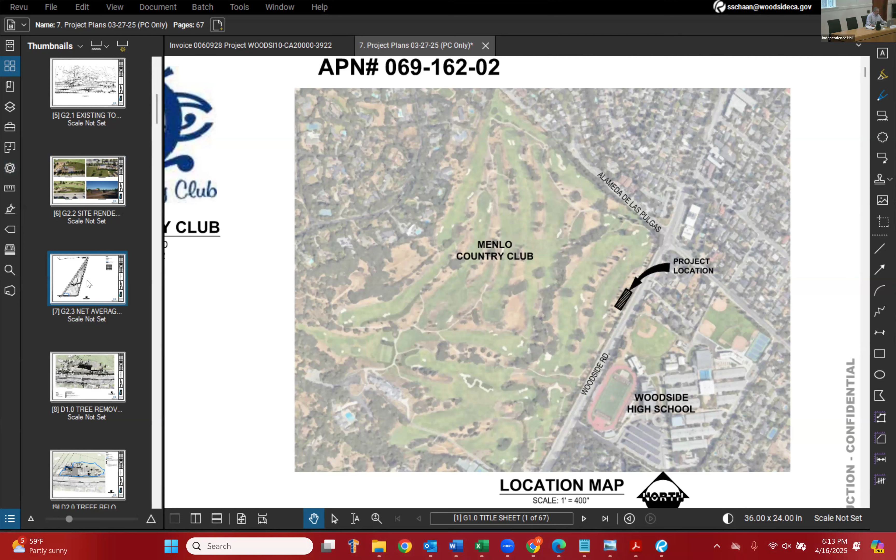Just show here the existing conditions. So here's just kind of a survey plan. I'll just try to explain a little bit. I know it's a little bit hard to read. Shows a number of topography lines. Along Woodside Road, there is an existing vehicle entrance gate there.

There's also, if you see this diagonal dash lines here, this is a major water transmission line for the San Francisco Public Utilities Commission. It's actually a parcel owned by the SFPUC, and the golf course has actually an easement to cross it to put their golf course on top of this water transmission line. So this access gate here, it functions, one, if there's any need for SFPUC to access their water line. It's also used by the country club in minimal fashion.

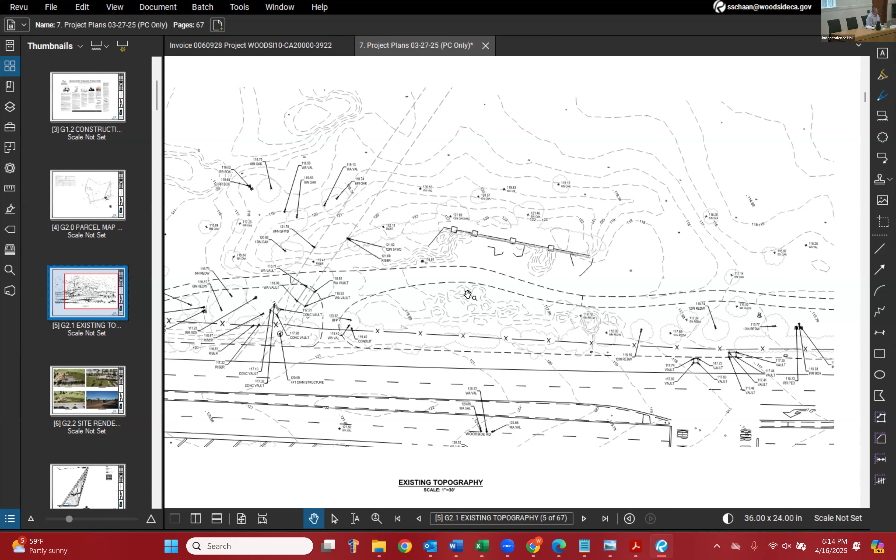There is an existing area here that is for sand storage. So for maintenance of the golf course, they have to replenish the sand in different areas. And so this is where they store the sand for the golf course.

So this is the site plan showing the proposed facility. What you see here is this dash line on the lower part of the slide shows the existing sewer line. And the Menlo Country Club would not trench through the Woodside Road. That'd be very disruptive to traffic as well as the roadway, but they would be boring a pipe underneath the roadway to the existing sewer line. And that would then take the wastewater from the sewer line to the facility.

There's a lift station here that brings it into the treatment area, a series of pumps and other mechanical equipment, all to be located within sound attenuated storage containers. So the sound coming off the site would be minimal. There's a noise study that's been provided for this project, and the project would not exceed any of the decibel level readings that are allowed at the property lines.

They are rebuilding the sand storage, so it's still incorporated into the same area, and that would be right next to the facility. A large piece of the project that no one will see once it's completed is the underground storage tank. So this is where the treated water will be transferred to the underground storage tank, and they would rely upon this water as long as it's available through the hotter months of the year. The remaining solid waste would then be rediverted back to the sewer line. So here's another line coming off of the site back to the main sewer line on Woodside Road.

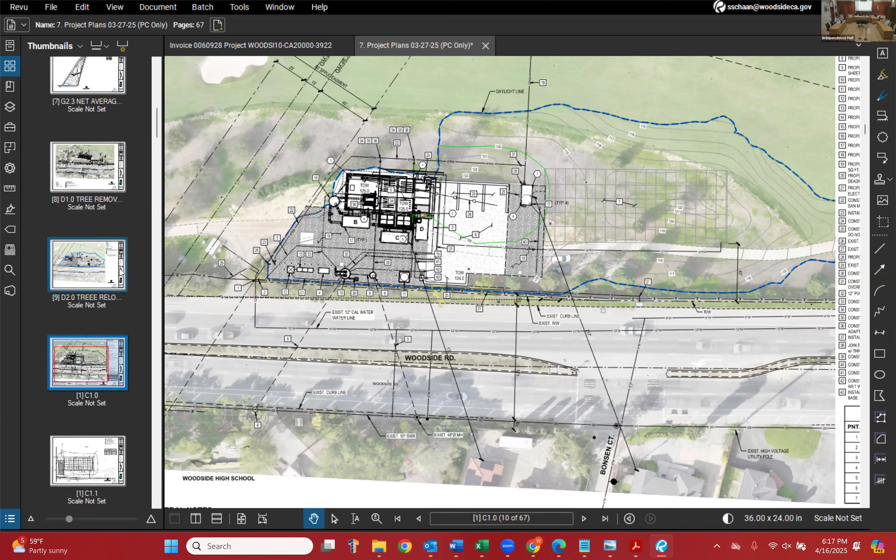So there's a lot of technical details in this plan set, but I think one of the easiest ways to understand and visualize the project is to look at the renderings that they've provided. So you can start here with these aerial renderings. This is a view from the Woodside Road area onto the site. This is that existing gate that I was talking about.

And there's some smaller equipment that's located adjacent to the fence, as well as a storage container in this area and maybe part of this storage container. All of these are within 50 feet of the front property line. Therefore, a variance is required. But given the location and the need to have close access to the sewer line, staff has outlined recommended findings for approval of the variance.

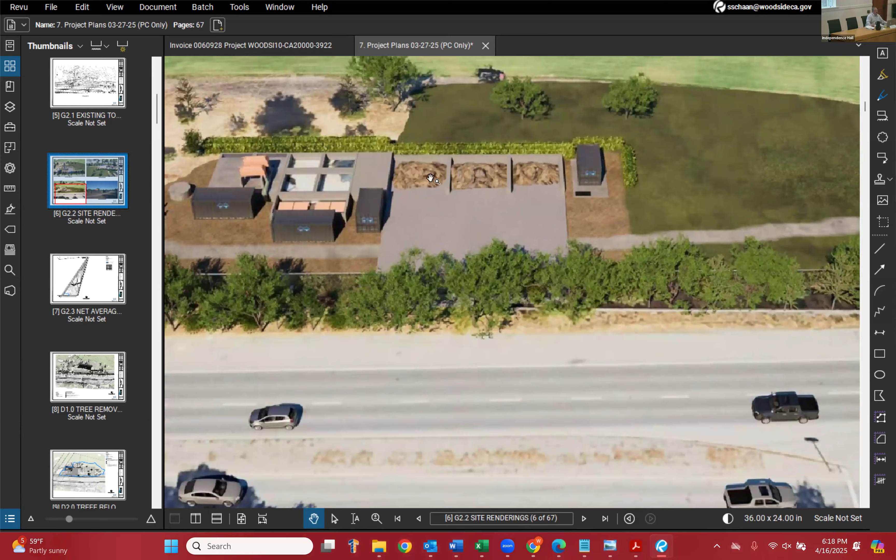So these would be the storage containers with different equipment in it. And these are just the sand areas. So these are not directly related to the water reclamation facility itself. It's just a replacement of the sand storage areas that are currently in operation for the club.

The Menlo Country Club is looking to do a berm to help kind of screen the facility from the golf course. There's also a recommended condition of approval to work with staff to see if there's any infill landscaping that might be able to take place along this border to further reduce the visibility.

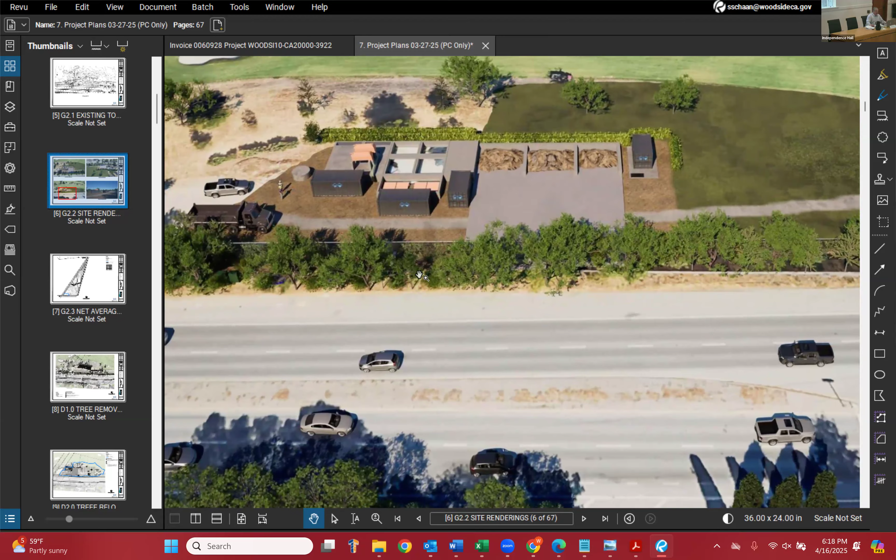And to touch on the visibility, the story poles are installed. So if you've had a chance to see them, you'll note that all of the equipment, even the storage containers, are below the existing fence line. Menlo Country Club has a 10-foot tall fence that was approved by a variance several decades ago. And it has slats inside of that chain link fence, so it really obscures the visibility.

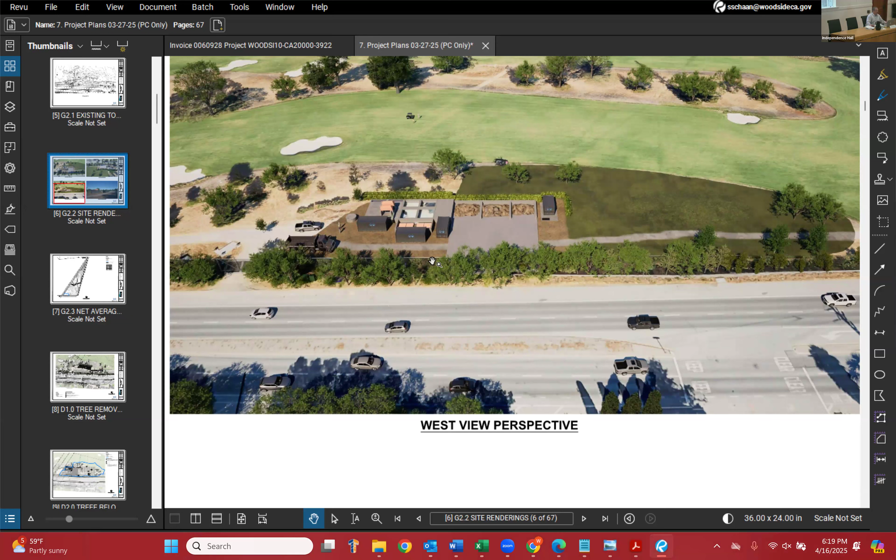And there is some landscaping there, and there are probably some opportunities to put in a little bit more landscaping to help fill that in. But none of the equipment will protrude above the fence line. So whereas we can see it in this aerial view, you really won't see much of this facility unless you're kind of peeking through the slats of the fence.

And we'll just show kind of some different views. These, again, are typical shipping containers, whereas these will be insulated with noise attenuation components to help reduce the amount of noise that comes out of any of the pumps or other noise generating equipment.

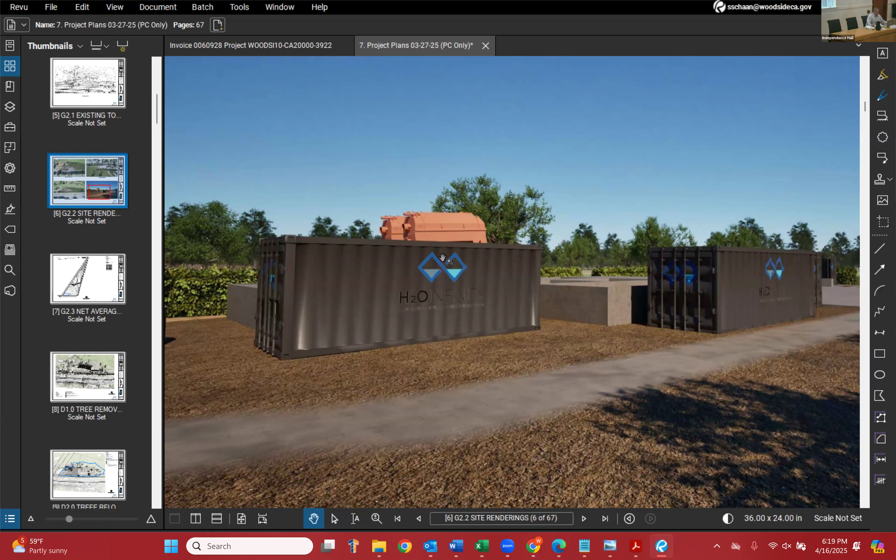This is just a side as viewed from Menlo Country Club. You can see a little bit better the little lift station area that would be part of what brings the sewage onto the site and releases it back out into the sewer system. But you'll see that, again, these pieces of equipment are relatively low profile, and staff has conditioned the project for whatever equipment can be to be painted a dark brown to further reduce the visibility.

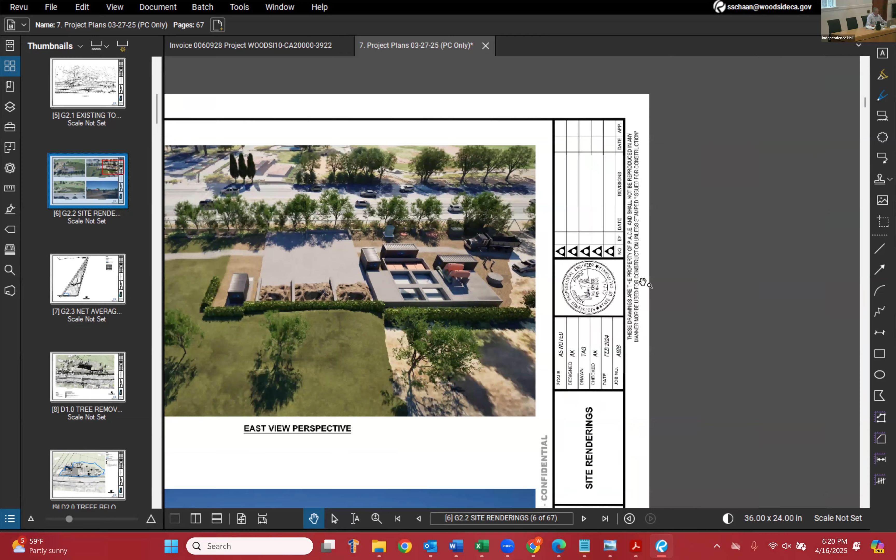And lastly, this is just a direct aerial shot showing everything over the site. I should note that this is not the only access to the site; the main entrance to Menlo Country Club further to the west actually has this kind of utility driveway that comes through their plant storage area as well, and it can be accessed from that.

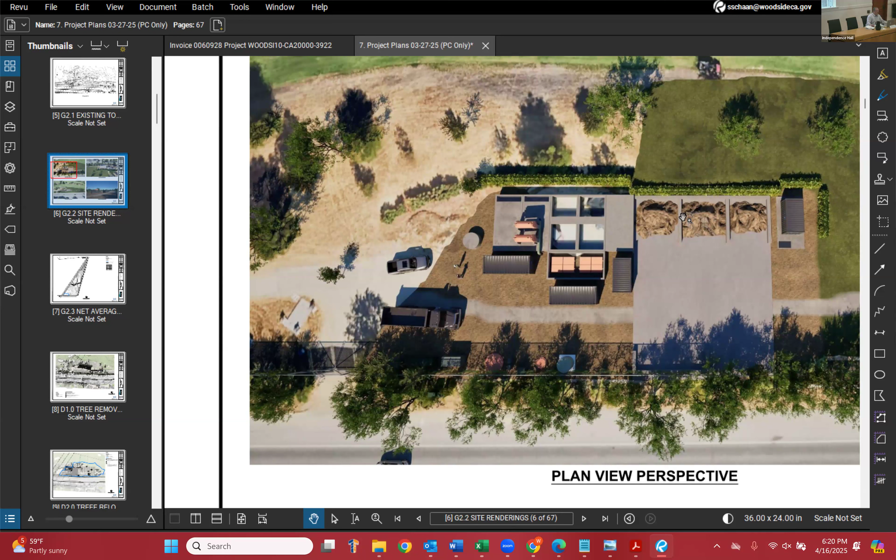So a lot of the smaller typical day-to-day traffic, if any is needed, will come through the main entrance, whereas this entrance will primarily be used for any large installation of the equipment, as well as it's used for the sand storage area.

With that, I guess I'll conclude my presentation. I'm happy to answer any questions you may have. And Menlo's team, as I've noted, has a lot more of the technical expertise and can help answer any of those technical questions if you have any.

Alex, do you want to lead off? I just have an informational question. Regarding the waste that will be the byproduct of the treatment, of the reclamation, this is just for my own personal interest. How will that be? Will that be mixed with water and then pushed down the sewer, going down towards Redwood City? How does that work?

That's right. You already talked to me. Thank you very much. Hi, Andy Comer. I'm the design engineer of record on this project on behalf of Menlo Country Club. Sage, great job on presenting that. You hit 99% of the points.

So just to answer your question, basically, wastewater is brought into the plant as needed to fill that tank, as Sage had mentioned. There's beneficial bacteria in there that basically remove all the solids, but then that liquid mixture can be strategically sent back to the sewer system at a time in the middle of the night, for example, to flush out the downstream sewer.

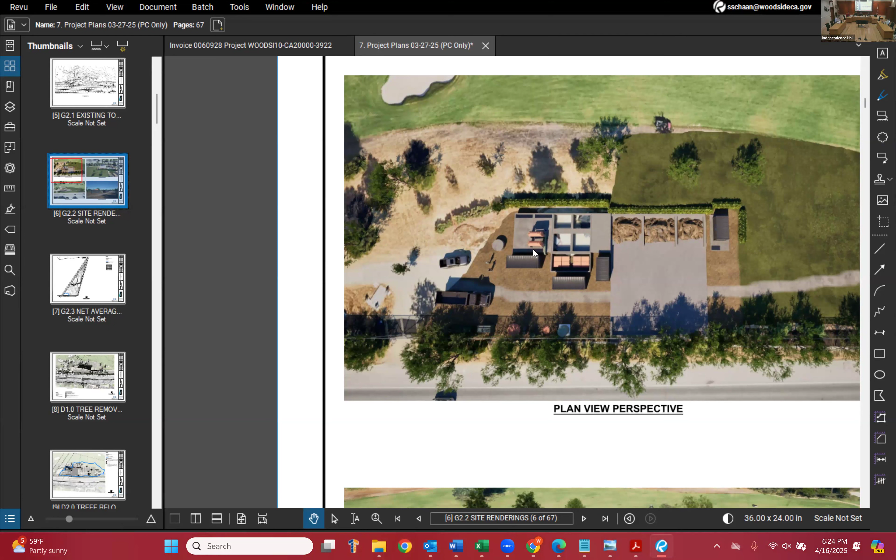And why don't we finish with questions for staff? Then we'll let this gentleman present on behalf of the country club, and then we can grill him as much as we want. So do any of the commissioners have further questions for Sage from the Townsend? All right, given that, the applicant or the applicant's representative can come on up, and if you have a presentation, do that, and then immediately, and then we'll move on from there.

Great. I think we have a PowerPoint presentation that is being pulled up. While that's happening, just by way of introduction, my name is Steve Gonzalez. I'm the general manager of Menlo Country Club, and I just want to thank you all for having us here tonight to consider this project. Menlo Country Club was incorporated in 1904, so we've been part of the community for 120 years, and in that entire time, we have dedicated ourselves to being responsible environmental stewards.

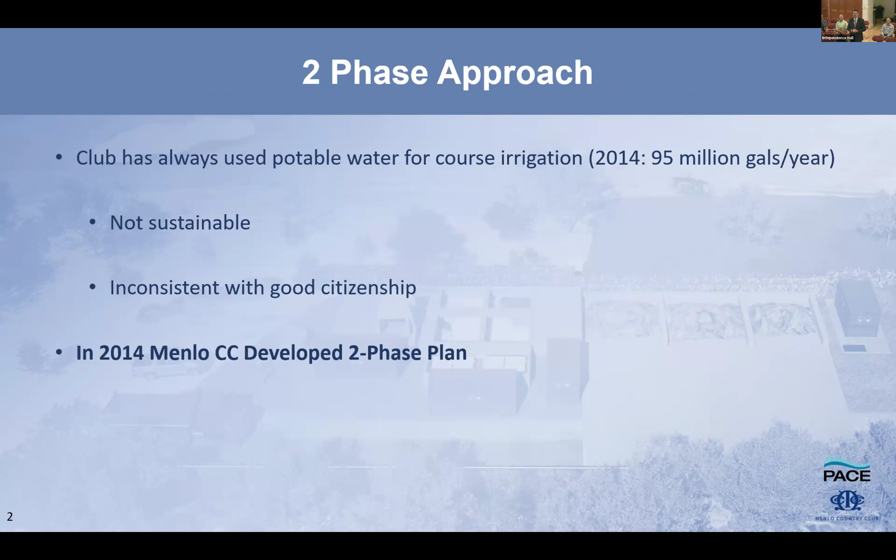And as we continue to look at those sustainable practices, one of our biggest challenges has always been water and irrigating the golf course. And so about a decade ago, we came up with a two-phased plan, if you'd like to flip to the second slide, because we saw that we were using about 95 million gallons of water per year, and our only source of water was potable water. That's not sustainable in the long term, and it's not consistent with our good citizenship. So we developed this two-phase plan. If you flip to the next screen, please.

So in 2015, we upgraded our irrigation system and put a state-of-the-art irrigation system in that we can really dial in our water use. In 2017, we reduced the size of our fairways, and we replaced about 40 acres of our rough with native grasses that don't need to be irrigated. And then, of course, in 2022, we did our turf conversion project and went from ryegrass to Santa Ana Bermuda, which is a less thirsty turf. So we were controlling the things that we could control.

And now we're into phase two, because that only got us about 44% of the way to where we wanted to be. And so now we are looking for a water source, which is why we're here and we're talking about our scalping plant. We're targeting an additional savings of about 36 to 38 million gallons per year, which will give an 83% overall reduction of the potable water that we're using if we can move forward with this project. So that's what we're here to talk about. I'm going to turn it over to Andy because he has some additional technical specs that he's going to go over.

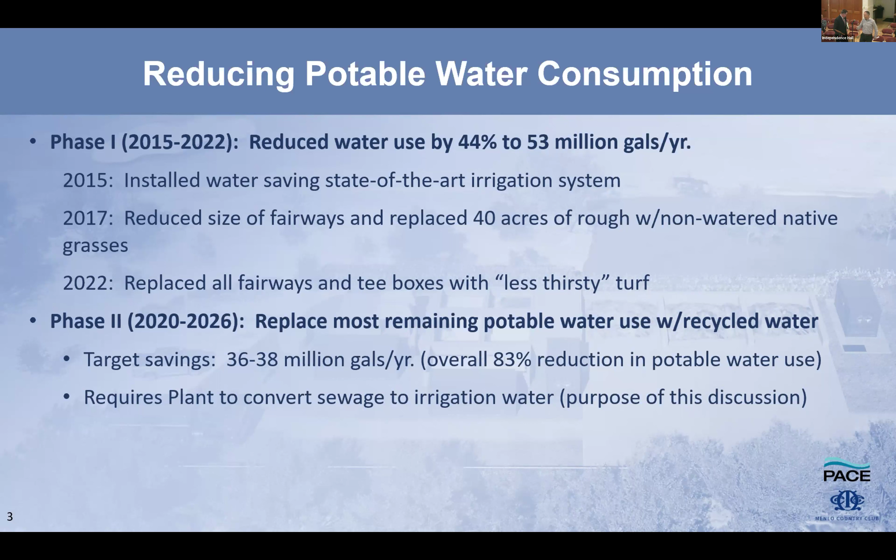Thank you, Steve. So the next slide, I've got two slides, and it's the same one you saw in Sage's presentation, and it kind of hits on some of the points you were asking about. So these plants are becoming very commonplace. There's one 2 miles away at Sharon Heights. It's been successfully operated for a couple years now. It's making water. We were unsuccessful in helping out on that one, but we've helped out on a lot of projects in the Bay Area that are similar to this.

And the technology has gotten to the point where you bring it in, you pump it a little bit, and it comes out clean on the back end because we use membranes. Some guy 25 years ago in Phoenix, Arizona, dropped membranes into a sewage tank and decided that that was a great way to treat water, and that now is the industry standard, which makes things a lot easier.

So looking at the screen from left to right along Woodside Road, you've got about 0.2 million gallons a day flowing towards the bay. It gets treated and actually wasted and sent into the bay currently. And so we want to build that 0.6 million gallon underground storage tank that Sage had mentioned, and fill that thing with clean water and use it to irrigate the golf course.

As soon as that tank comes down from completely topped off to less than topped off, then we're going to call for some local source water. And so that local source water, instead of going straight to the bay, just takes a little bit of a diversion. And that's actually a closed diversion system.

So if we decide not to pump, it just continues to do what it does today by gravity. It's completely fail-safe. But when we need water, we'll send it up into those 2 millimeter screens that I described. It drops into the plant. That drop of water is in the plant for about 6 to 8 hours, and it comes out the back end disinfected, odorless, colorless, nutrient rich water, and it's perfect for irrigation. Hundreds of golf courses in California use it for irrigation.

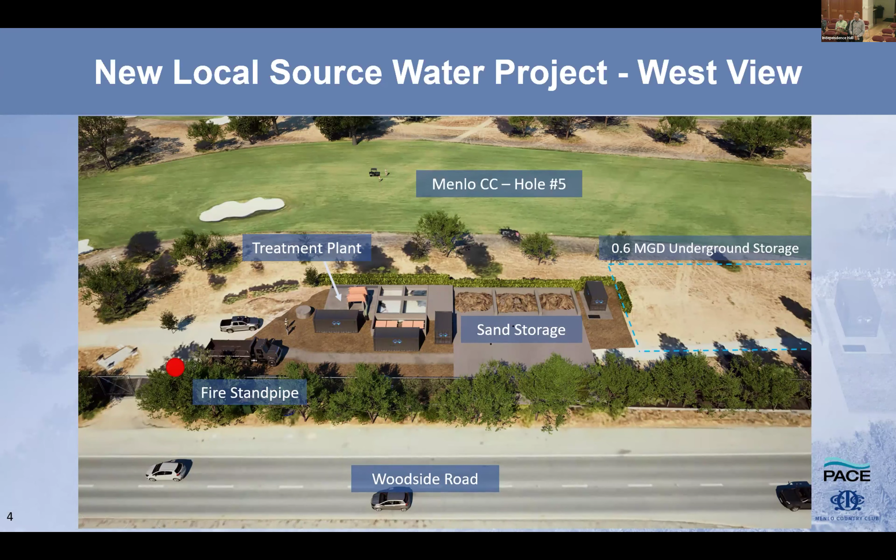So 4 benefits of the project, and then we can answer questions: 83% reduction in potable water use compared to 10 years ago, which is amazing. Fire water, if we need it, we've got a lot of it. It's under pressure. It's right there on the side of the road. Thirdly, unlike Sharon Heights, that was a lot of form work and pouring and stuff built on site, we're going to have a very small footprint here, built off site, assembled on site.

And fourthly, probably the most important thing, we're going to have the highest grade of recycled water quality that you can get. We're treating with a membrane that has 0.04 micron pore size. That means you're squeezing the water through there and everything else is rejected. The water comes out crystal clear on the back end. And it's proven technology that we've used all over the place in this area. So with that, we'd like to take questions.